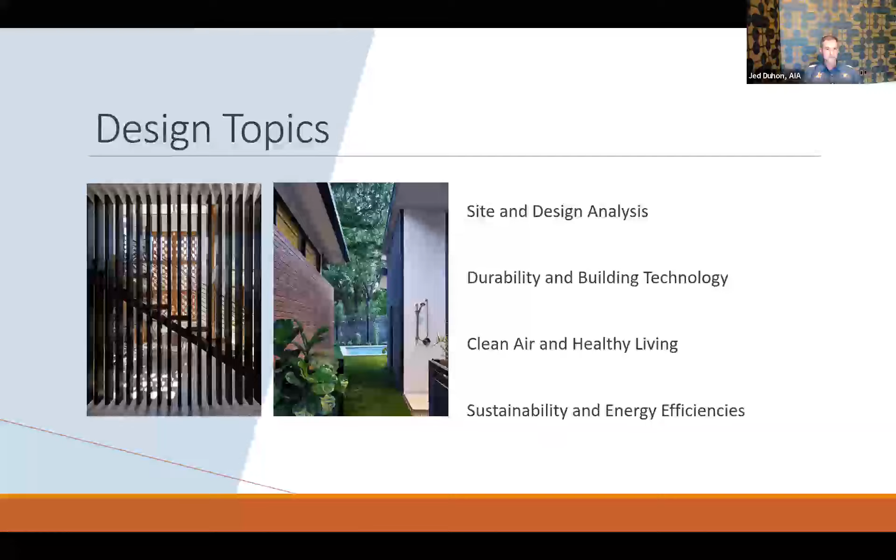Okay, so way back in 2017, pre-pandemic, my family and I started to look for a potential property to build a new home. Our previous home was a larger house, a series of different additions, and had a very steep backyard with some wasted space, and it wasn't very inviting for outdoor use or guests. So I had the idea to look for a smaller, flatter lot to build on, and to create something that was a more efficient space, a smaller project, and downsize. At least that's the way I pitched it to my husband, and he might argue that I didn't quite get there downsizing on the project, but we'll talk about that at another time.

We narrowed our search to the Allendale neighborhood. There's a lot of amenities and restaurants and schools, grocery stores, et cetera, all in this area that are easily accessible. It's a very pedestrian-friendly neighborhood for walking and biking. There is an H-E-B here, and Amy's Ice Cream for the kids, Twin Liquors for the adults, Shoal Creek over here for bike paths and walking. So we really like this neighborhood a lot. And we found this property that was for sale and took a closer look at it.

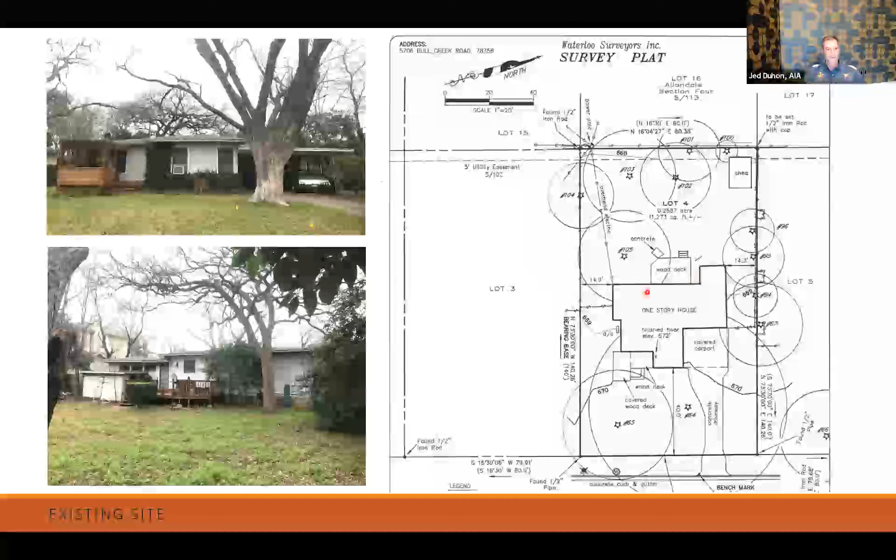So we sat and thought about the property for a few weeks. Again, remember this is 2017, you could do that sort of thing. But eventually came back around and took the challenge to design around that tree and on this property. So we purchased the property and got started with design.

I'm showing here the house was small enough because it was 900 square feet. We did some research and found that there was an organization called the Reuse People of Austin that you can donate the house to. So we donated the house and they came and lifted the house and put steel beams under it, disconnected all the utilities, and got it ready to be relocated. It ended up in Wimberley, Texas, for its next life.

They prepared the house to leave, which I was glad to see, around 11 or midnight at night. So it wasn't during daytime, because I had this whole time this great fear I would see this house on a Monday morning stuck on the Mopac Express lane, blocking the traffic. So great group. They knew how to do it and took care of all those things.

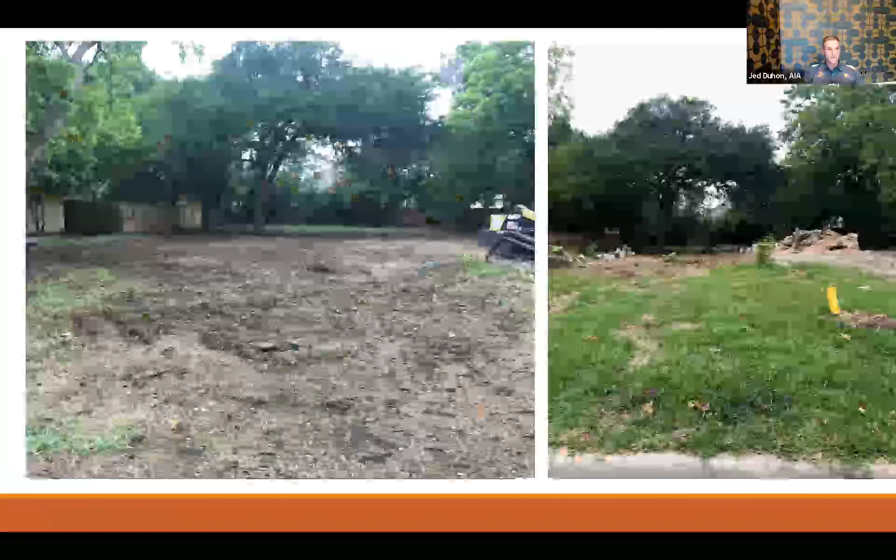This is the property once the house was removed and just kind of open. It became springtime and you can now see the leaves on the tree and how far it really extends into the site, and the challenge I had ahead of myself. But also, I fell in love with the tree. Once you see it, you can tell how beautiful it was, and it was really special. And at this point, I knew that I would focus a lot of the design around this tree.

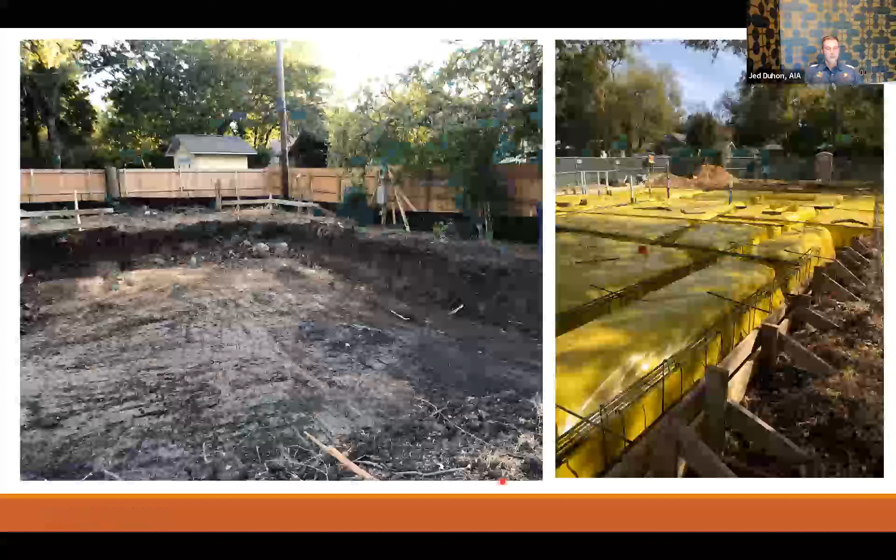And speaking of challenges, during the design process, we did a soils report or soil testing. And it turns out that I have some of the worst soil in Austin, which can be common around the Shoal Creek area or other creeks around town. Lots of clay and it's very expansive. So we had to remove 4 feet of the soil and replace it with more stable soil. I think all the neighbors thought we might be building a community pool when they saw this huge hole in the ground. Sorry, it's not a pool.

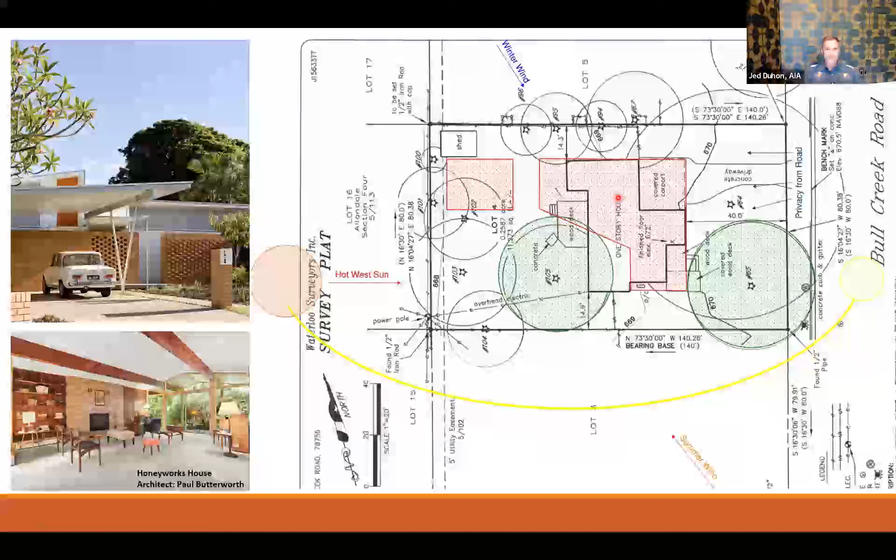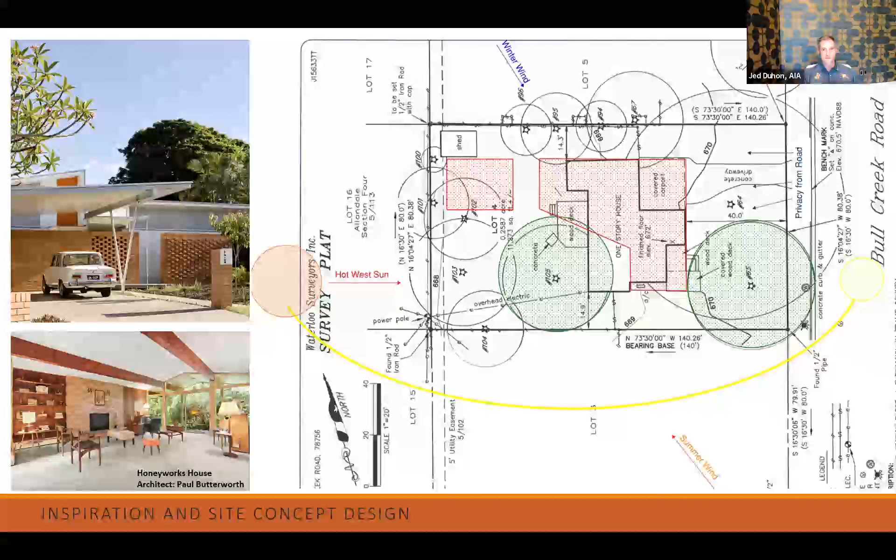Okay, so backing up to the design process, I'm going to talk about some of the inspiration of how I approached this design and the concept behind it. I began the design with an idea of doing this nice, simple, mid-century modern house. This is an example of many that are out there, but I've always really loved the brick detailing here and the roof angles and window placements and all the things that are quintessential mid-century modern.

I also strongly believe in having lots of direct access and views to the outdoors, and how it benefits moods and health and overall well-being of the families, which of course is one of the principles of mid-century modern architecture. That's when you finally started seeing houses open up to the outdoors and lots of natural light in the houses. I've had great appreciation for the materials inside mid-century modern houses, with terrazzo flooring and brick, stained wood finishes, exposed beams, clean lines, open plans, and lots of color.

So I had this concept in mind approaching the site, and I started to really look a little closer and analyze the site. So I identified wind patterns, summer wind and winter wind, and where there might be good opportunities to place porches or any outdoor areas. I located all the setbacks and easements around the house, the front setback, and started to narrow in on the buildable area.

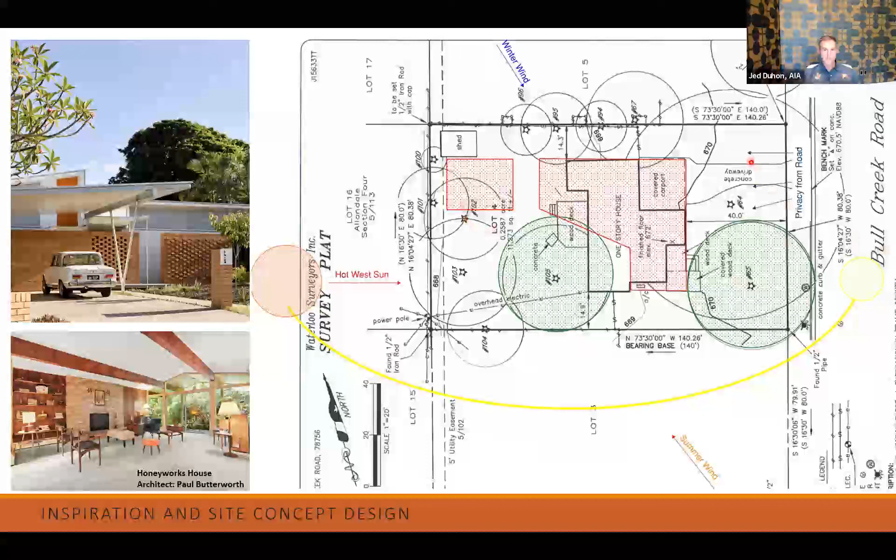Looked at the sun pattern of the east. This is the front side of the house over here, and studied the sun movements of the house and where it was good to position the house. I wanted to get a standard west-east orientation that helps protect the south side of the house from direct sunlight.

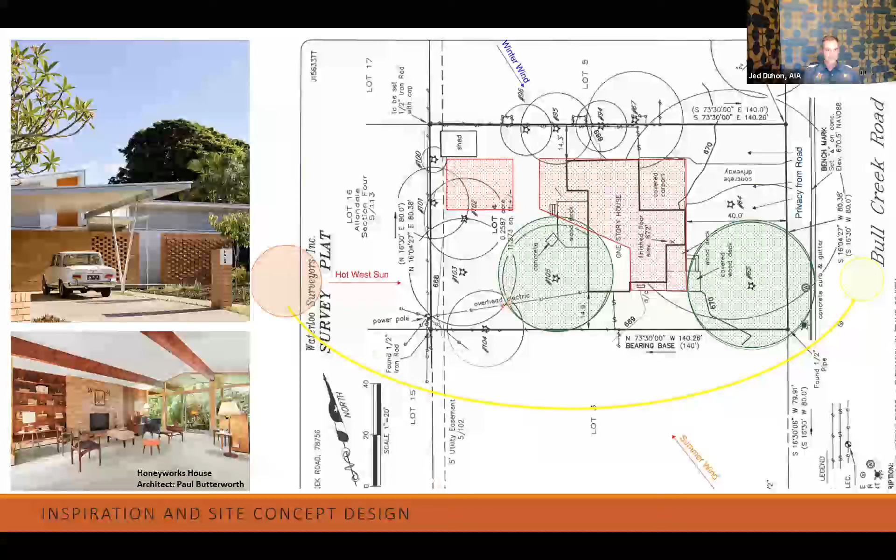But once I put in the protected trees, my footprint became this little L shape. It has this little angle here around the tree to preserve the critical root zone of the tree. During conceptual design, knowing that this tree would be my focus, I really concentrated on trying to get all the major spaces, the primary bedroom, office, kitchen, and living spaces all right around this tree. Also, this was my main area of having direct contact or connection to the outdoors through windows and doors and glass. I attempted several options with this more orthogonal plan.

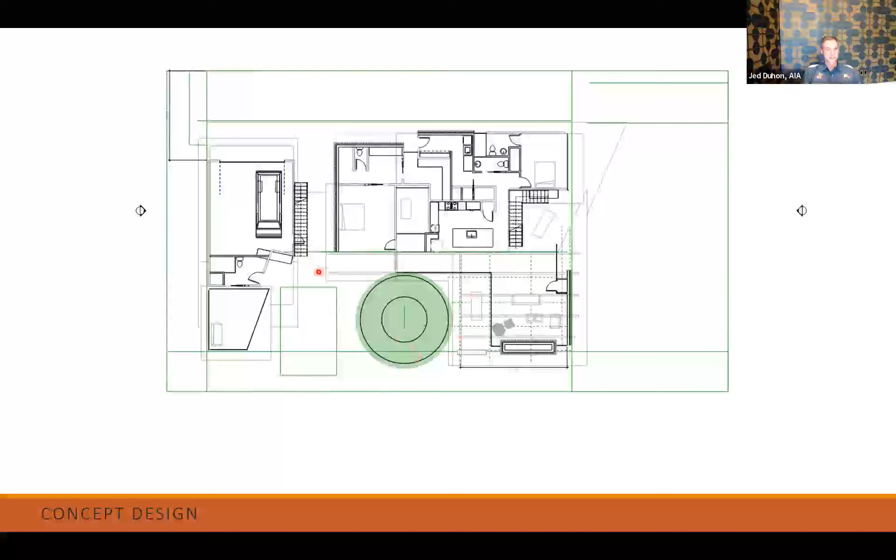This is just a screenshot of the Revit file early on, trying to go back to that original inspiration that I had. But I just found that this shape kept limiting some of the backyard space, and I wanted a little bit of usable area for the backyard.

So I went back to that original concept that showed the L shape, and the angle in the plan ended up being in the final design, which is solidified as a 21-degree angle that shows up in the plan. I started playing with it, and it ended up preserving the tree, but it became a playful element for the house to create different voids, volumes, 3D shapes, and different angles that appear throughout the rest of the house.

Also started to really study the shading of the house. This being the front of the house facing east, we'll have some direct sunlight. So I provided some covered areas that cover the windows high. There's a balcony here that protects some of the glazing here. There's the brick screening that creates both privacy and shading.

But the real concern is on the west side of the house. The south side's more protected since the sun's high in the air and overhangs protect the house a lot more, but the west side is where it can be really exposed. So I have the garage placed back here to protect the house. It's a detached garage, along with this blue shaded area which is a covered area, and it really helped protect a lot of the back side of the house from the west sun.

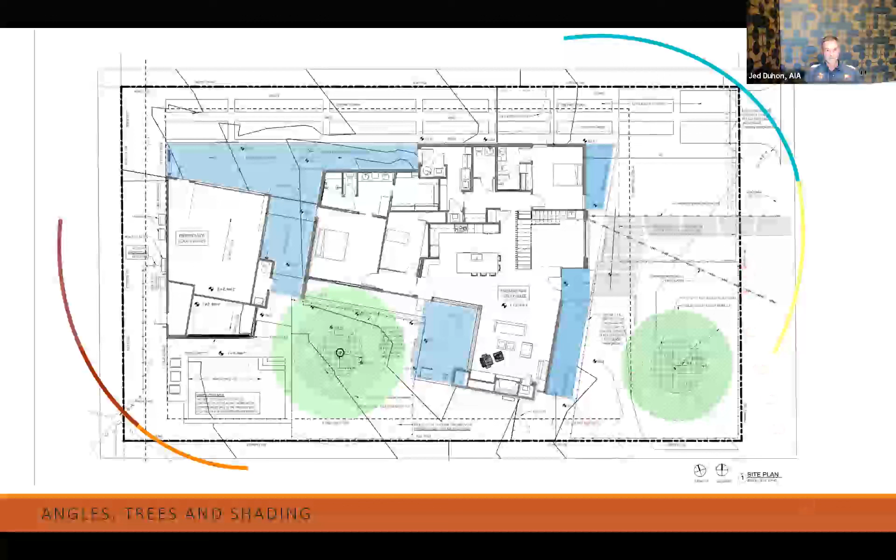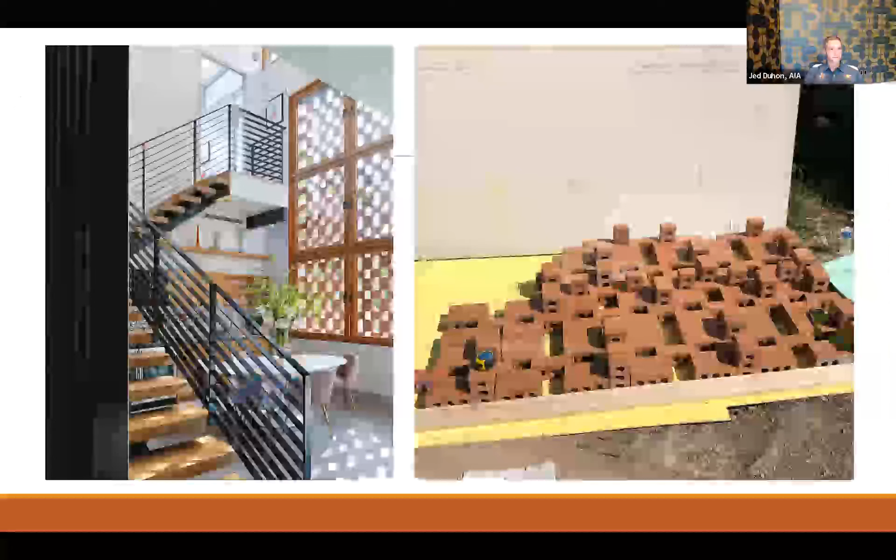Another challenge was this screening here, where I wanted to provide some shading and privacy, but also have a good amount of natural light coming into the dining area. This is another one where my contractor Ford stepped up and really helped figure out these details.

The first challenge we had was filling in the 16-foot tall void of windows. We had to find a window system that could support itself over 16 feet, but also casements that open inward. A lot of casement windows open outward, so I had to find some that open inside.

So we were able to clean inside the windows. The second challenge of the screening was the lateral load. This whole area is void of any brick ties, so with the help of the contractor, we concealed some steel bars in the system that help with the lateral load of the brick.

The last part of this is finding the perfect balance between void and solid to let in enough light, but not too much, and to add some privacy. This was a photo shot during construction where we were laying out different patterns in the driveway of the house, and we came up with all these different ideas. But of course, this was the one that landed.

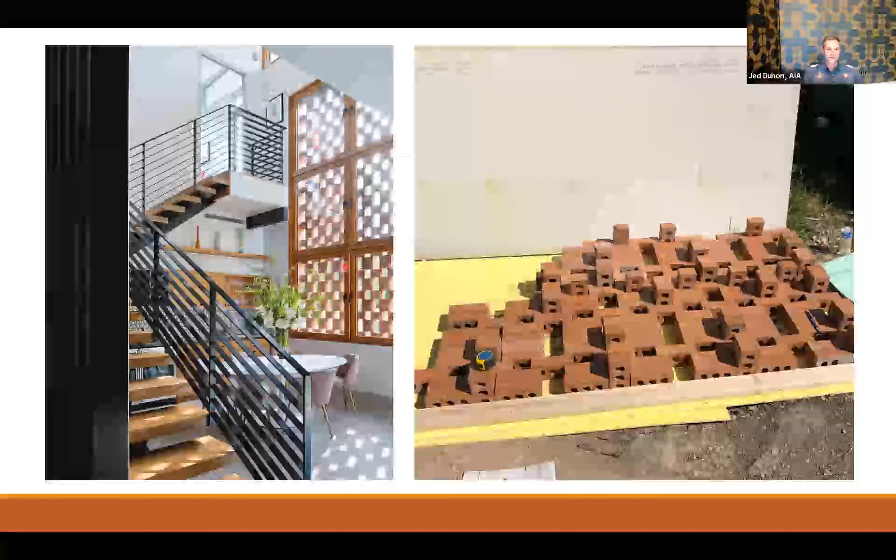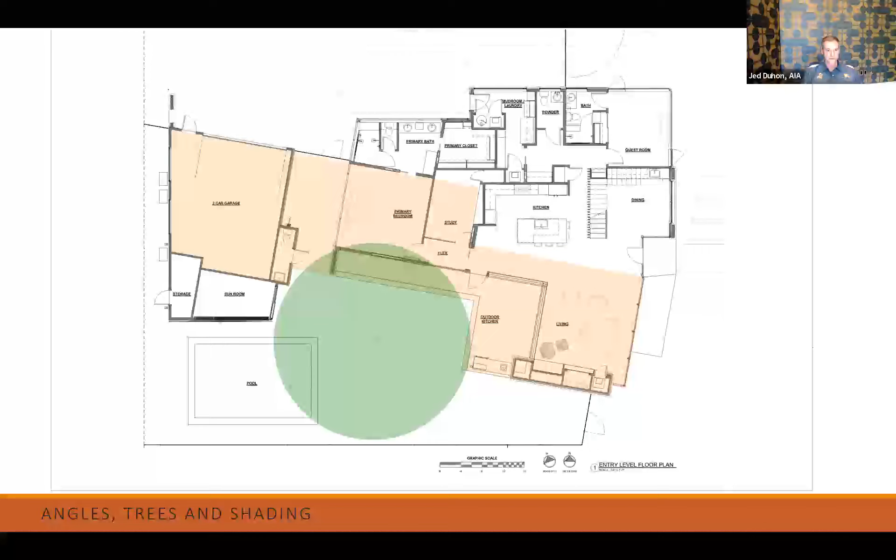On the second level, this is the roof below the tree. I pulled the walls of the second floor back to allow the canopy to extend over the first level roof. This is showing the first level roof where the tree extends beyond it, has a chance to continue to grow, and how I pulled the house back a little to give it breathing room.

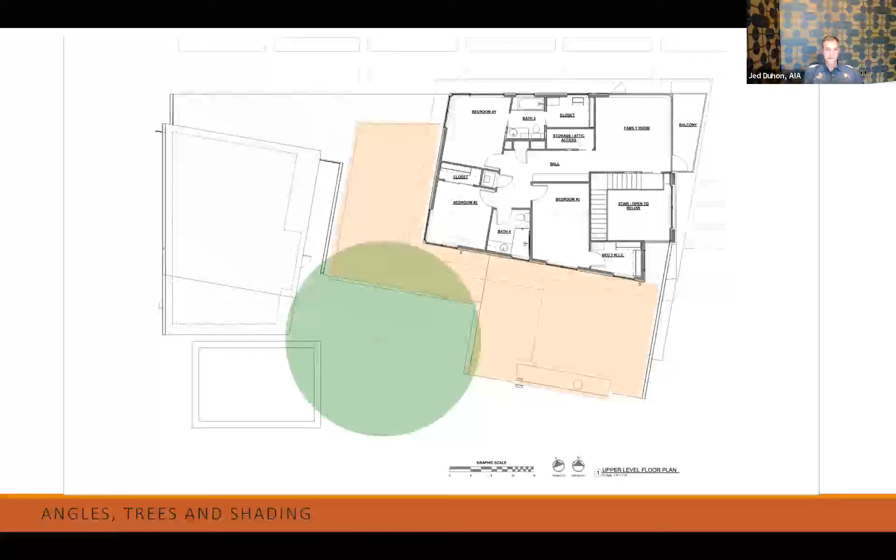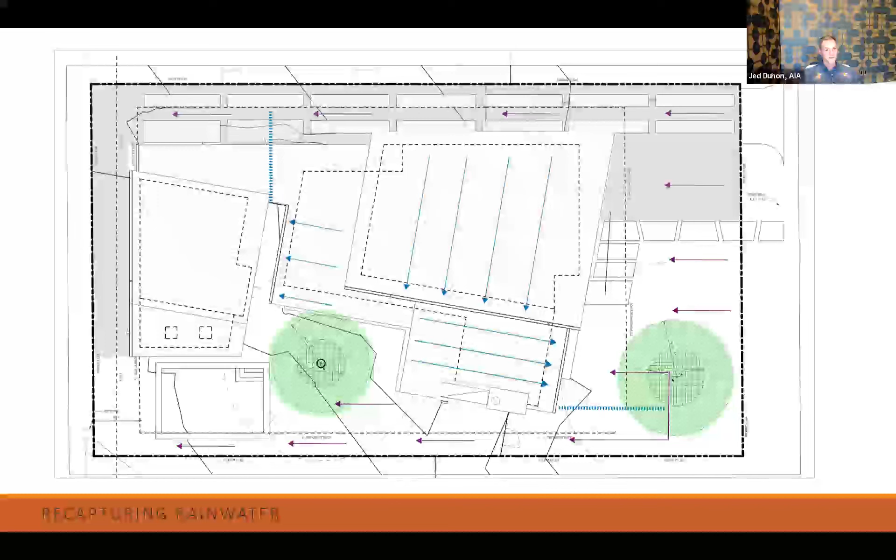This is the roof plan, showing again the angles of the roof and how they relate to the site.

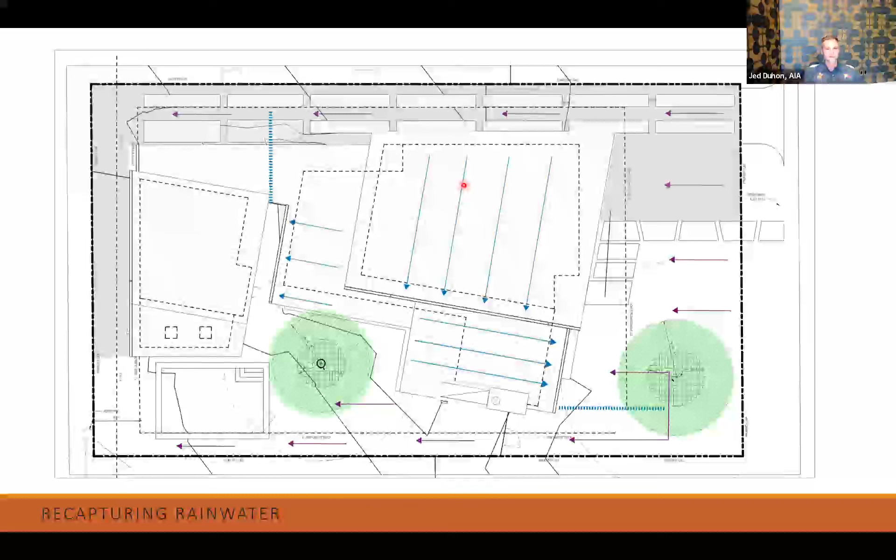I had an interesting request for my contractor and landscaper. The lot is high at the front of the house and slopes basically directly to the back. With the idea of preventing runoff, I asked if we could somehow get all the rainwater collected on the roof back to the front of the house. The landscaper said, yeah, no problem, we can do that. What I thought was going to be a huge challenge requiring civil engineers and a lot of people involved actually became pretty simple in concept.

This area here is the second floor roof. Water slopes down to this gutter, which falls to the lower roof and comes down to a rain chain and flows underground back up to the area of the critical root zone of the tree. So this entire area, probably about two-thirds of the roof, comes back to the front of the house and has a chance to be recaptured as it flows back down through the site into the grass and the critical root zones.

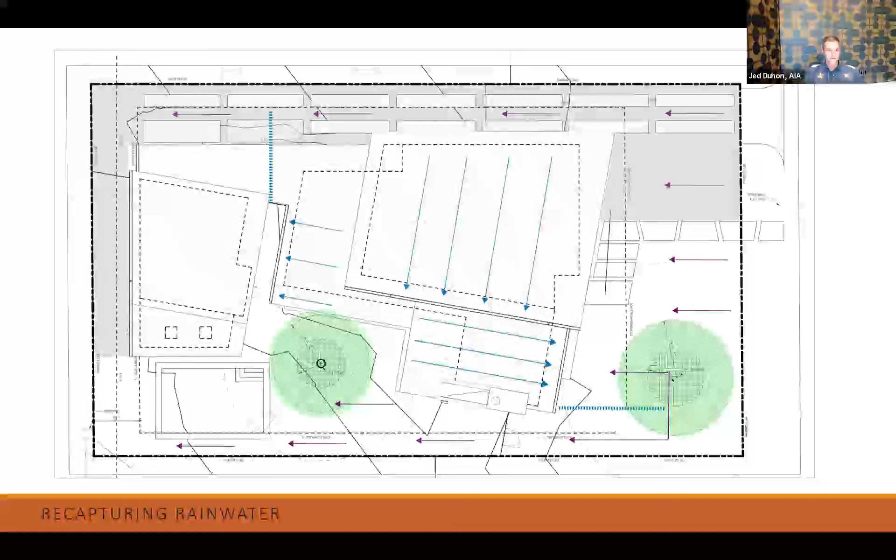There's a little portion of the roof that is piped over into some of the driveway area here, and all this area of the driveway, slightly shaded gray, is meant to recapture water on the site as well. These little cutouts in the driveway ribbon are intentional so water can flow through the site, and it works really well. We never see any ponding or standing water going off the site, which is important being close to Shoal Creek and preventing as much runoff as we can.

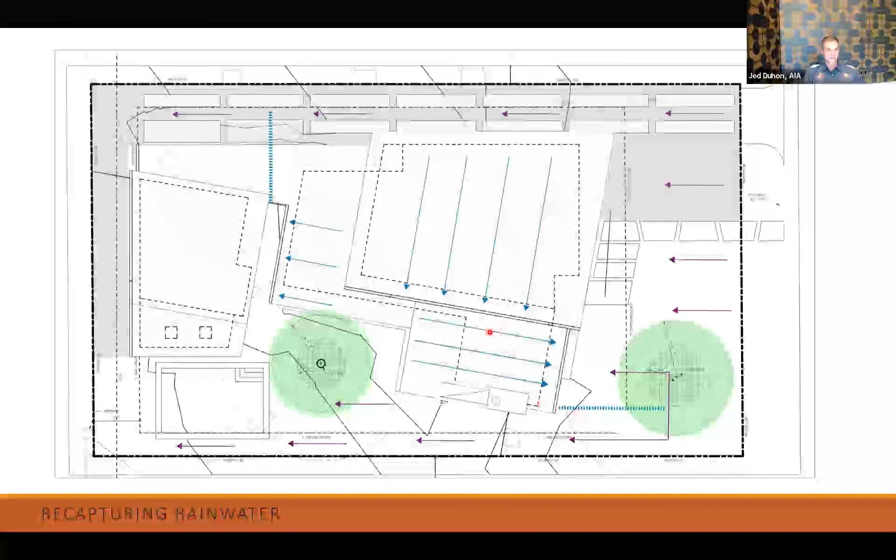These photos in here - so I spent all this time designing this great roof that helps recapture water and shade the house. And at a moment during construction, my kids jumped out this window and were playing on the roof. So here's my 'oh crap' moment, standing there thinking I provided a direct escape route for my kids to sneak out of the house, going down the roof to the low part here. So now the house has alarms and chimes on the windows in case that window opens, just to make sure.

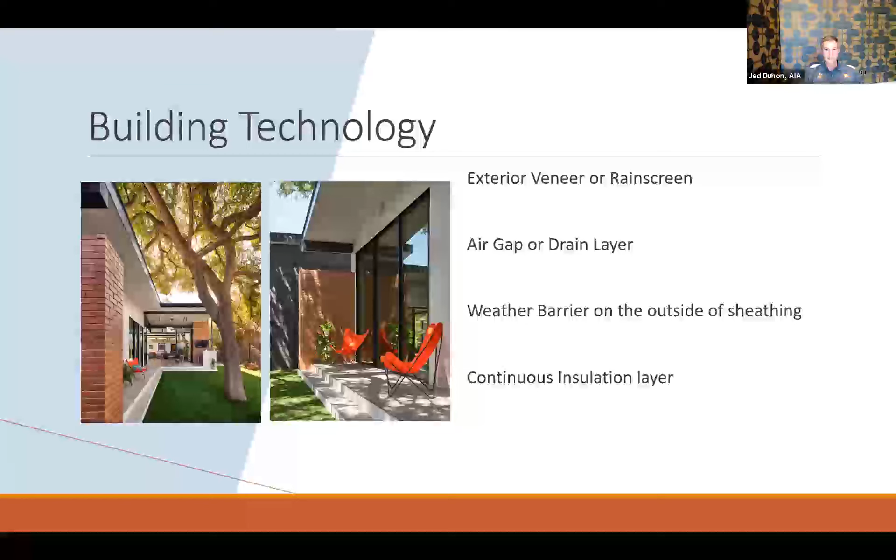Okay, so moving on to building technology. These are four principles or basic concepts that can be applied to really any house or structure and sort of building.

So the first layer of the house is just your exterior material. It's the first line of defense, protecting from sun and rain. Of course, you want to specify materials that require little to no maintenance. Try to avoid painted wood or trim fascias and windows and those things that deteriorate with the sun. All these materials here are great for holding up against sun and UV - they're not painted materials, there's stucco, but there's not a lot of maintenance here. There's metal fascias, and all of these materials should hold up for a really long time.

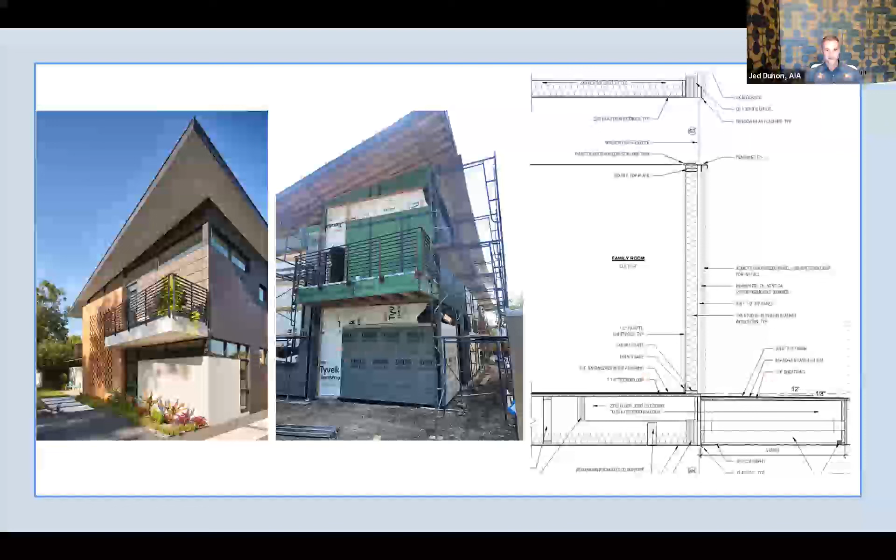Spray foam is a good product because it has great insulation. It also works as an air sealant for the house. But it does off-gas some VOCs. So it just depends on our client; if they have any sensitivity to VOCs, we might push them to do the BIBS system instead.

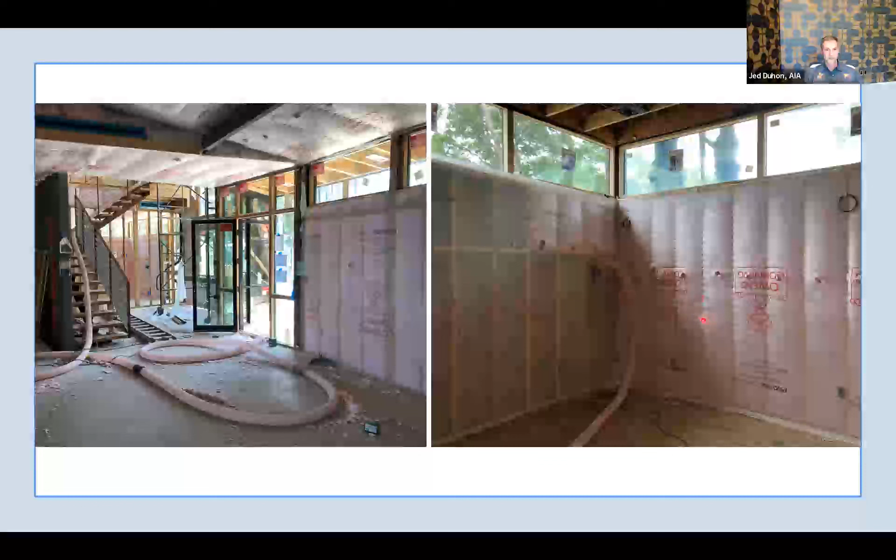All right, moving on to clean air and healthy living. We spend a lot of time in our homes, especially now that we've been working at home more during the pandemic. The average person spends up to 34 years in bed and half of their lives inside their home. So it's important to have clean, fresh air in our homes at all times. So we do our best to prevent any pollutants seeping into the house, as well as provide good air filtration to capture the dust and pollutants that get in the air.

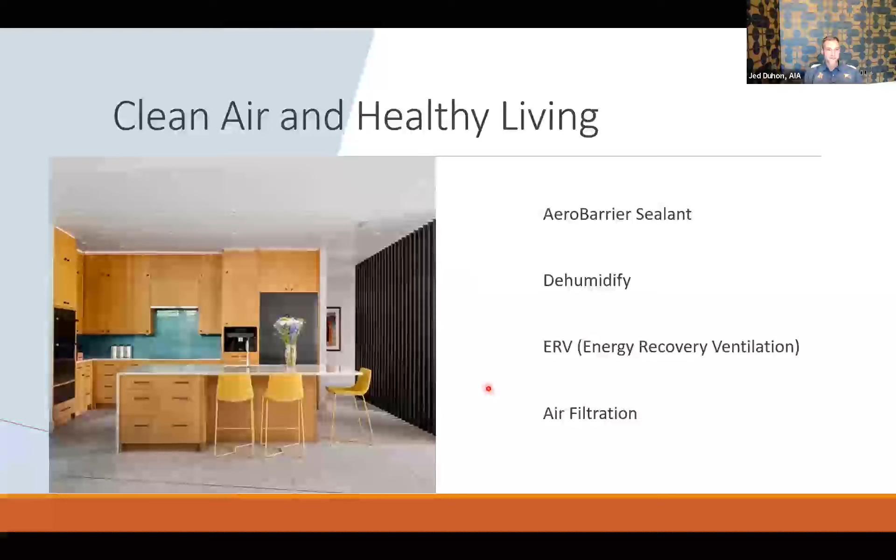These systems go through the AeroBarrier sealant, dehumidifiers, ERV, and air filtration. They help achieve a good quality, healthy environment for the house. Okay, starting with the AeroBarrier system. This is a cool product. So they use this vapor that they put in the house. It's water-based, the mist that is sprayed throughout the house that effectively seals any leaks throughout the house. And so it fills gaps 1/2 inch or smaller. They pressurize the house, put in these misters, and just leave it on for several hours.

And you can walk around the house and see, if there's a major hole in the house, you can identify it because you can see the mist coming through. But as contractors, as hard as everyone tries, there's always cuts around electrical outlets or windows, or little things that we miss in the seal. And this system seals up all those different types of areas where you just can't visually see where there might be holes in the house. So this provides a good sealant to the house to allow it to stay dry and clean and protect it from moisture or air coming in that carries moisture and pollutants, et cetera.

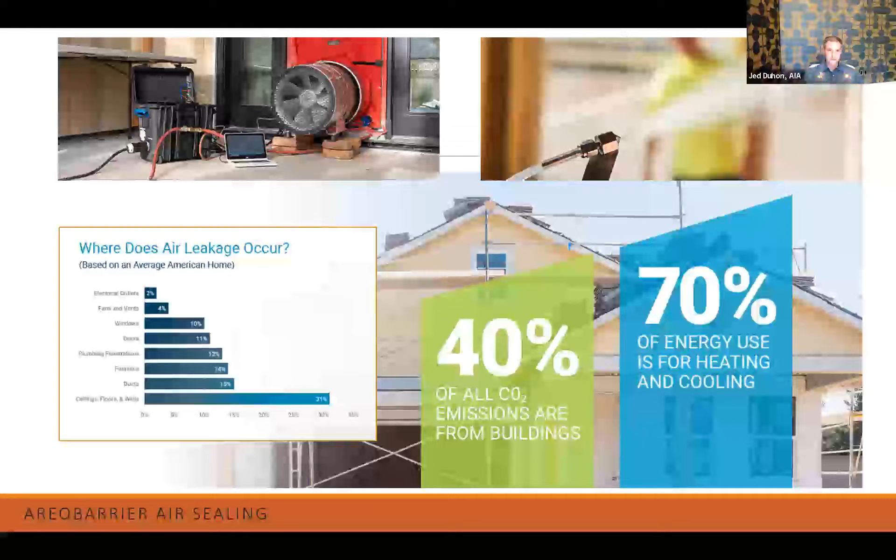The next one is a dehumidifier. As we know, we live in a very humid climate, and year-round we have high levels of humidity outside. The ideal humidity level inside the house should be around 40 to 60, which often, of course, is not the case outside. So to help maintain that environment inside, we use dehumidifiers. We could do a whole hour on all the benefits of having a dehumidifier and dry air in the house. They help reduce mold and mildew, bacteria. They help reduce, surprisingly enough, insects in the house and different types of pests. It preserves finishes and furniture, preserves your bedding and clothing. It helps with dust and dust mites. There's a lot of benefits to having a dehumidifier in the house.

These systems also help the air conditioning systems run more efficiently because they remove the moisture in the air, and the AC is not having to run overtime or additional hours to continue to try to pull moisture out of the air. So having this system in the house makes your HVAC more efficient.

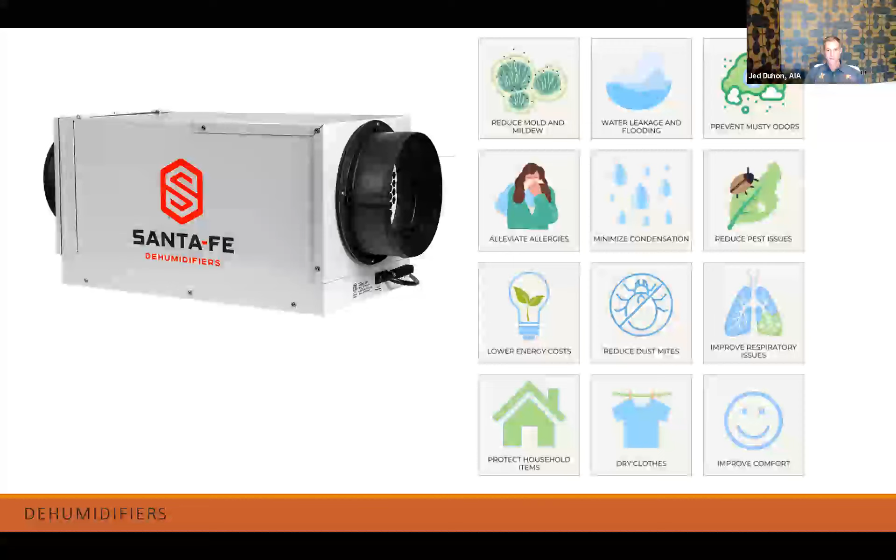Next part of that is including an ERV, which is an energy recovery ventilation system. Please don't ask me exactly how it works. From what I know about it, it brings in fresh air to the house, but it removes moisture from the air, and it filters the air. And so it brings clean, dry air into the house, and it removes air from areas that are known for having more moisture, like bathrooms and laundry rooms. So this system pulls air out of the bathroom and replaces it with fresh, filtered, clean, dry air.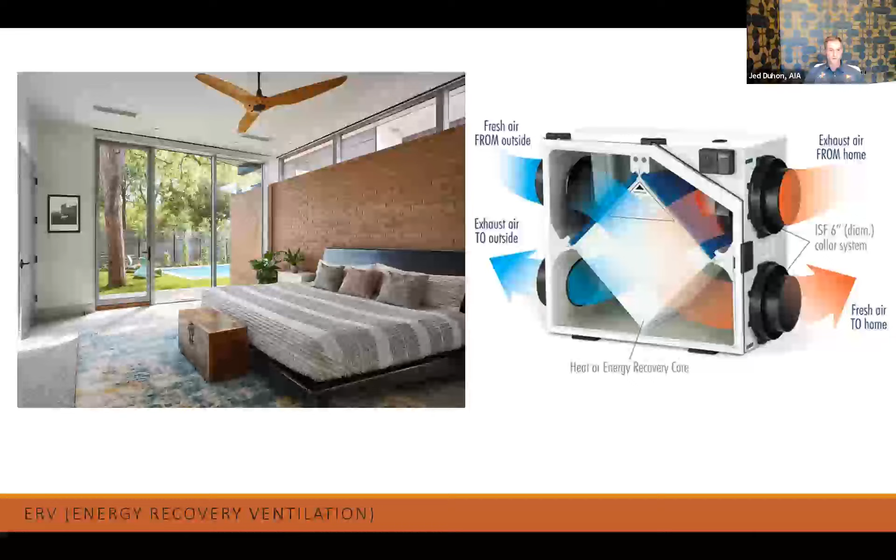We'll have one in the house. Sometimes you can place multiples, depending on the size of the house. But because these houses we build now are so sealed up, it's a great way to bring fresh air inside. And then the last part of having a healthy environment is just the filtration system.

Having a MERV filter in the house, they really do filter out a lot of pollutants in the air. MERV is just a rating devised by ASHRAE to determine the amount of particulates the filter is removing. Once you get into a MERV 13 and 14, it really removes a lot of things in the air and keeps your air pretty clean.

Once you go beyond, I think, MERV 14, you start getting into systems that are HEPA filters, which are systems on their own that supply clean air to the HVAC system. But between MERV 14 and a HEPA filter, there's only like 5, maybe 10% difference in how much of the pollutants and particulates it removes from the air. So having a 13 or 14 really does the trick.

Okay, so moving over to sustainability a little. I want to talk about the systems that I have put in my house that help make it efficient and sustainable. I do want to point out that I understand that my house is not the most perfect sustainable house. I like nice things. I like having lots of windows and having a pool and heating and cooling, and I like having guests over and throwing parties.

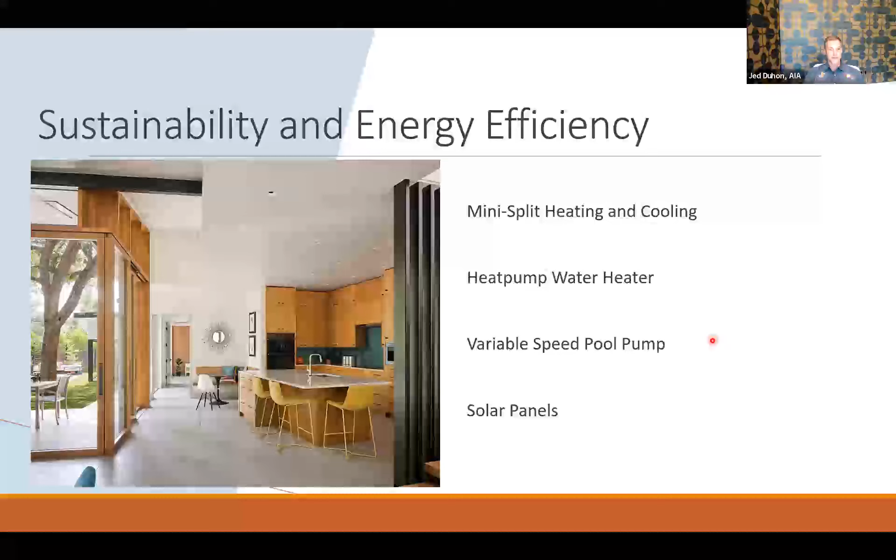But I do want to point out the things that I have done that really make this a very energy efficient house, while keeping all the parts of the house that make it fun and the things that I like. So before I dive into these types of systems, I want to touch base a little bit on our electrical grid.

I think in general, the word sustainability can be very confusing to people. There's a lot of information out there, and it's hard to sort through all the information. We're all trying to do something better, but it's really hard to know the impact that we're having with the decisions that we make to be more conscious or be more sustainable.

So I always like to argue, and probably most experts will argue, that our biggest challenge, and probably our emergency challenge, is to reduce the amount of fossil fuels that we're putting in the air. It should be our #1 priority to fix, reducing whatever carbon we're releasing in the air. So when I approach ideas of sustainability, I really have that one at the top of my mind. Of course, we still want to conserve water and reduce landfill and reduce air pollutants and recycle materials and so forth. I'm not saying we should forget about those, but carbon in the air should be our #1 priority.

So, where do we start? How do we do that? You start with electrifying our buildings. My house is fully electrified. I don't even have a gas meter connected to it. The appliances and everything in this house work great.

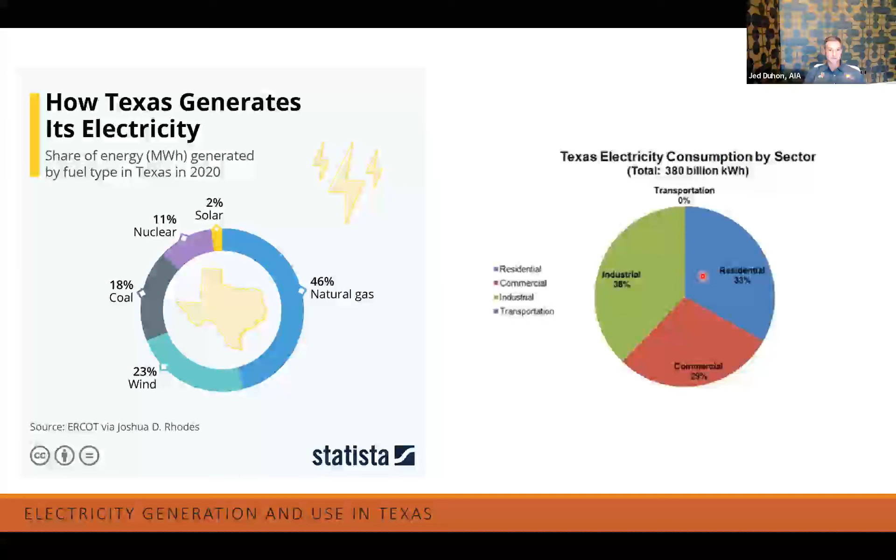Right now, Texas uses about 33% renewable energy. And it's projected, I believe by 2030, that it will be around 40% renewable energy. So quietly, our Texas grid system is moving over to renewable energy. And we want to support this in every way we can to reduce natural gas and coal. The second chart shows where building use is: 33% residential and 29% commercial. And these are areas where we can really make an impact and a difference by changing our systems.

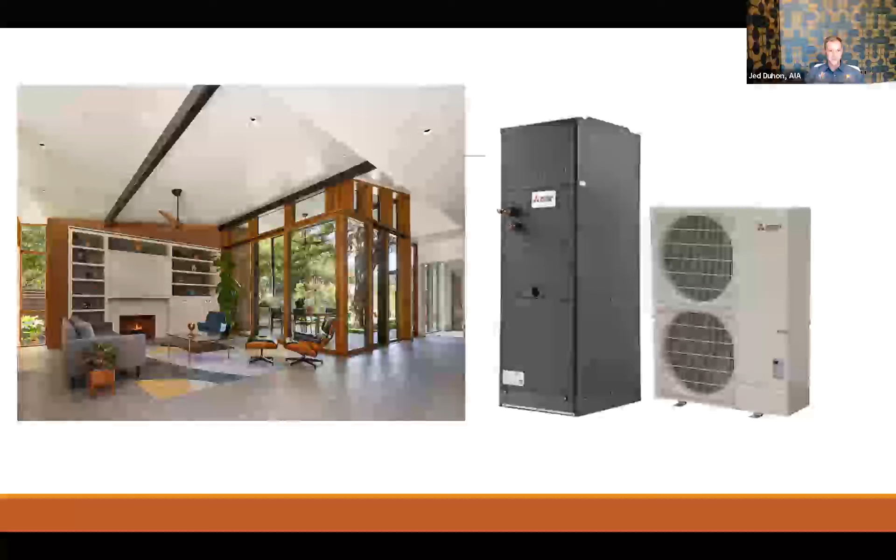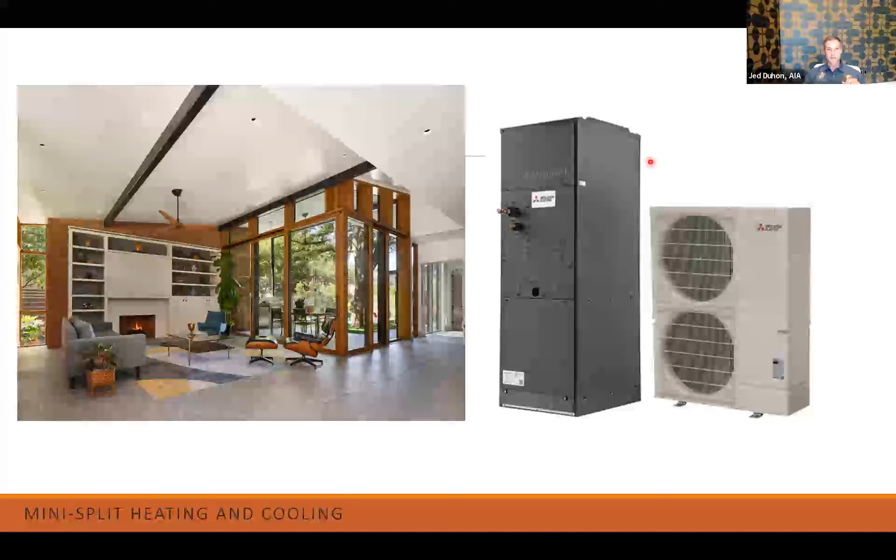Okay, so this is moving on to the types of systems that will help support our electrical grid and moving over to renewable energy. The first concept of all these systems is that they are energy sipping systems. You can schedule them to be used at certain times, but they also turn on at lower speeds and have variable speeds.

So starting with the mini split, which is a variable refrigerant flow and a variable air volume, which all means that it uses the amount of energy and fan power needed to cool and heat the house at that time. And it just doesn't come on and off at full speed. Another advantage of these mini splits is that they can be zoned: nighttime you would cool or heat bedrooms, daytime it would be the other spaces throughout the house. Each one of these outdoor condensers can hold up to 4 interior air handlers.

So for example, I have a system that is split between 2. One controls the bedrooms and one controls the living. So during the daytime, you turn one down, turn the other up. And so it's just not running the entire house.

I have this photo in here. One of the challenges that I had was heating and cooling this space. I concealed one of these units right here behind these shelves, and the air register is concealed right there. So that's where I got one of those eyes from my contractor, like, you want to do what now? But it works great, turned out very well. And that was lots of thanks to King Wood Cabinets for helping figure out that detail.

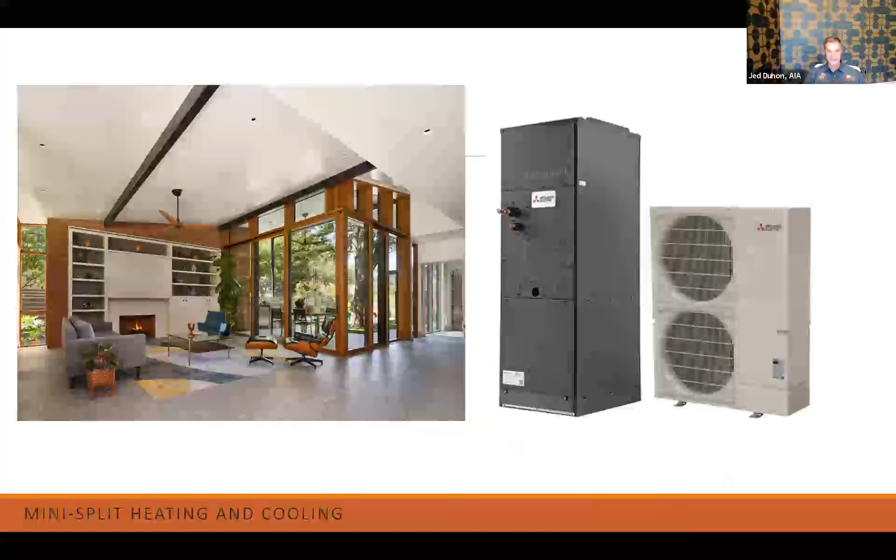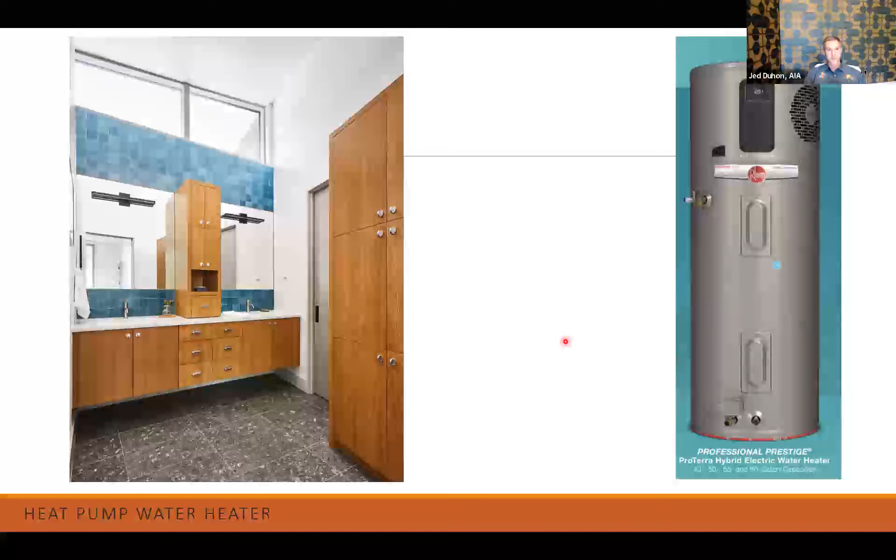All right, another cool system is a heat pump water heater. These systems draw air from the surrounding air into the unit, remove and collect the heat for water heating, and discharge cold air. They're super energy efficient, work well, and they have 4 stages of heating. So it stays in a very eco-friendly mode. But if you need additional heat, if you have people taking showers at the same time, it kicks in and supports that need. This is a great appliance to be put in houses because it can be scheduled to be used during off-peak hours in the mornings and heat up and then store the energy throughout the day.

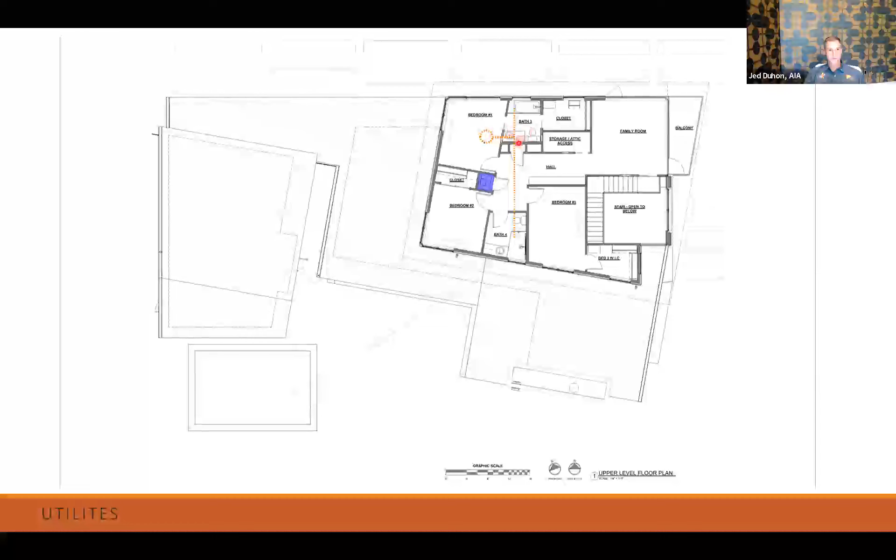This just shows real quickly how I located the water heater in the house to reduce the runs of the piping to the areas that it is serving. So primary bathroom here, guest bathroom, and kitchen, with the idea of removing the need of a recirculation pump in the house. Same idea for the air handlers in the house. They're located to reduce the run and power of the fan needed to get the ducts to the spaces they need. And this is just showing the same diagram upstairs where the water heater is below and just serving the two bathrooms right above on the second floor.

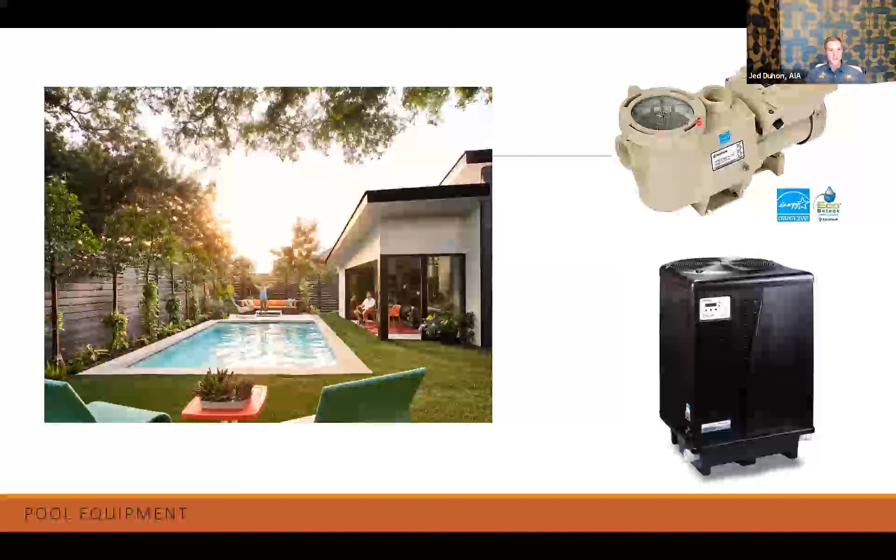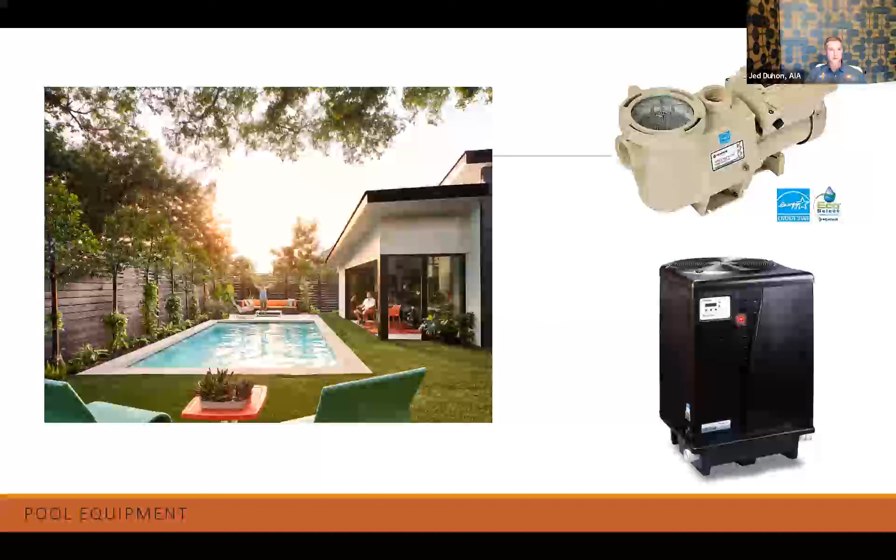Another system for the pool. This is a variable speed water pump that's Energy Star rated. So I start the pool cleaning system around 4 a.m. in the morning, and it starts at a certain speed, but through the day, because it's variable speed, it ramps down until noon. It just shuts off completely. So I use it during non-peak hour times to help the grid system. And this is a heat pump water heater, very similar to the heat pumps that we use for heating and cooling our houses. It's an efficient system. So instead of using gas, it uses electricity.

So to offset all these appliances and nice things that I have in my house, I have been installing solar panels. We provided an entire year of energy bills to our solar installer, and they calculated the need for over a year and designed the system to be net zero at the end of the year. So hopefully the system will work out. They're just installing it now, but the goal is that all the energy use I have will be net zero at the end of the year.

So the summary and point I'm trying to push here is that we can still have nice houses and we can still have our great natural light and all our appliances and things like that, but there are ways to schedule them for non-peak hours and to install solar panels and things like that to make it net zero. Another point to make is that all these systems, although I did it new in my house, can be retrofitted and installed at any point in any house. So for example, if your water heater goes out, then replace it with a heat pump water heater and slowly replace these different types of appliances with ones that are smart and work with our system.